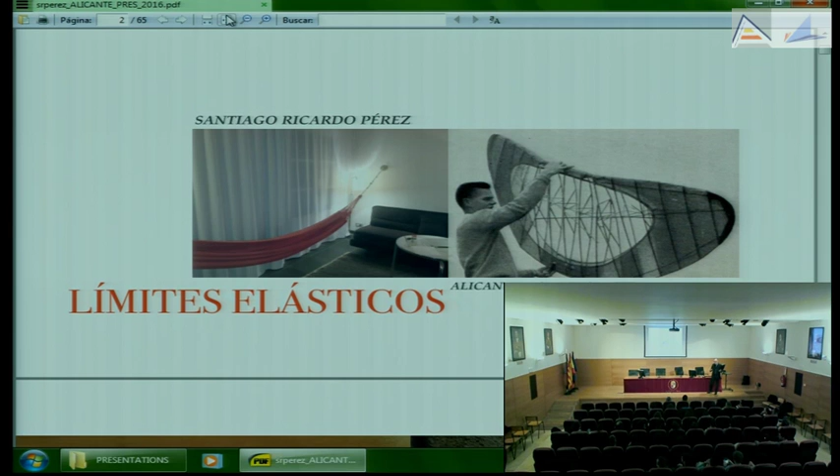Something strange started to happen. I spent 2 days in Barcelona before coming here, and everywhere I looked, it was like my hotel room, and instead of giving me a bed, they gave me this hammock, and I'm like, what's going on? Everywhere I've been, it's like I'm preparing for this event. It's been just amazing. Then the image on the right, I'm not sure who he is, but it kind of encapsulates everything I was hoping the fabrication workshop would be about, mixing skin and structure and things like that.

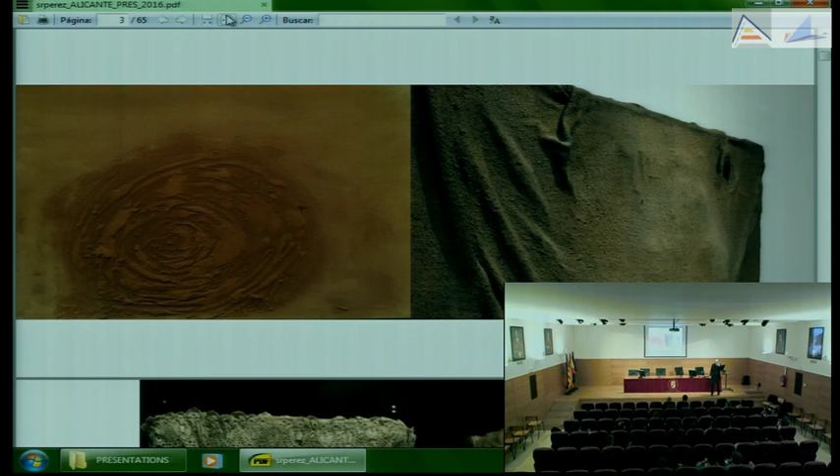Then I go to Tapies, the museum, the foundation, and the paintings are starting to look like things I imagined we're going to make, and it's just been incredible. Then I go to the Design Museum in Barcelona, and again these things are there, and this is kind of what we're going to do. Everywhere I went, it was like Spain was telling me, look at this. It's been just incredible.

So I want to share with you some of my beginnings to give you some context. I had an opportunity, if I can figure out how to do this laser—there it is—to study under Tadao Ando at Harvard at the GSD, and he was a professor there.

It was one of the few times he's taught in the United States. After that was over, he invited me to go to Japan, and I didn't have any money to go. I was very lucky—there was a traveling scholarship or fellowship that year, and I was able to get it. So I spent a year as a researcher in his office, looked at all his work, and had a sort of desk to study in his office.

But along the way, I started to meet also artists in Tokyo and Osaka, and I met this woman—I don't know if you can see this photograph very well, it's kind of dark—but her name was Naomi Seki. I was incredibly impressed with the way she worked with materials. I'd never seen anything like that before.

So I said, look, I don't know how I'm going to do this, but I'm going to invite you to Boston to do a joint installation and show your work. This was the first group of students I started working with back in 1993 in a design studio where we mixed drawing and regular design with full-scale making, and I've never stopped. I've been doing this ever since.

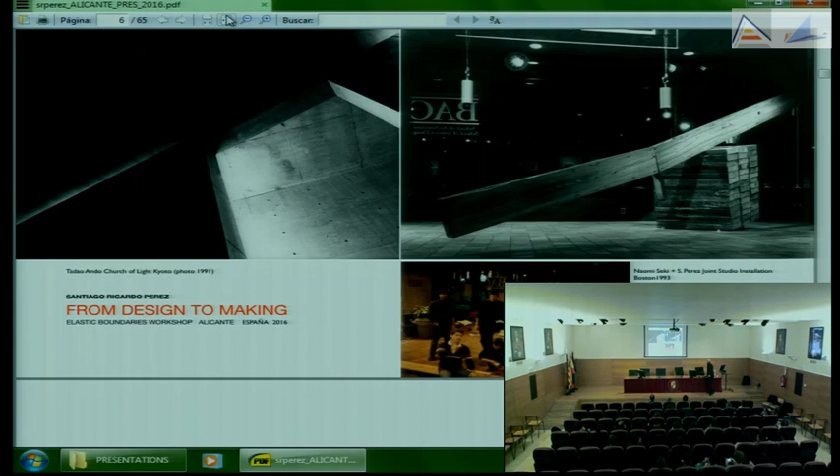And then the guy here with a little bit more hair, that's me. I could tell you stories about each one of them. That's kind of the beginnings of where these kinds of workshops and the type of studio I've been teaching came from.

I couldn't really think of a better word for this, so somewhere the word monster came up. I thought it would be fun to talk about monsters, and maybe there's a lecture I do on monsters. But these are just some quick images I sent over in preparation for the workshop.

The one on the left, many years ago, one of my students in Arizona built this little model. On the outside is an exoskeleton structure, and the interior surface is pulling on that structure. What was really interesting was, only about this big, but I've always remembered it—they were kind of codependent.

The skeleton would fall down without the membrane, and the membrane would not stay up without the exoskeleton. Then the work of Sean Ahlquist is this image here. He's teaching in Michigan, does amazing tensile structures, and codes meshes in Rhino—or not even in Rhino, he does it in pure code and processing—then adds the gravity force and watches it fall. He came and did a workshop with us.

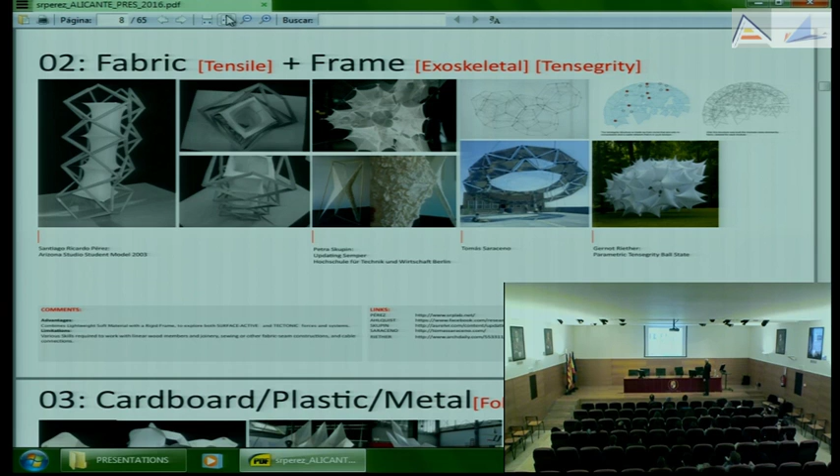This is Tomas Saraceno's work, and somebody did a pavilion that, I don't know, it's not really like what we did, but these were some images I sent over to get the conversation started. And again, these are pavilions I've done with my students. This is one in Houston—we used polycarbonate to set up a shell structure.

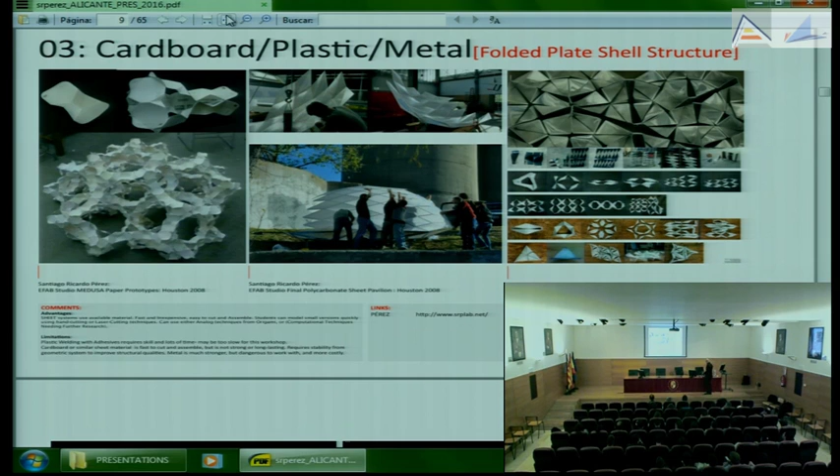The reason I wanted to show this image is because the way I introduce things, at least the way I think about them, is that we don't necessarily have to start with a form. You can start with the module or element, and learn the rules for how to combine that little element, like a piece of paper folded into a much more complex module, still not knowing what the form is going to be. That's how nature makes things. That module combines with some rules and ends up with something much more complex. So that's been the theme of a lot of the things going on.

I'm showing you a few images of prior work with my students in Arkansas, because they inspired what I wanted to do here. I had a student named Blake Leonard, and he was making speakers for putting in your car when there's a game, to have music in the parking lot. I said, what is that? And he told me.

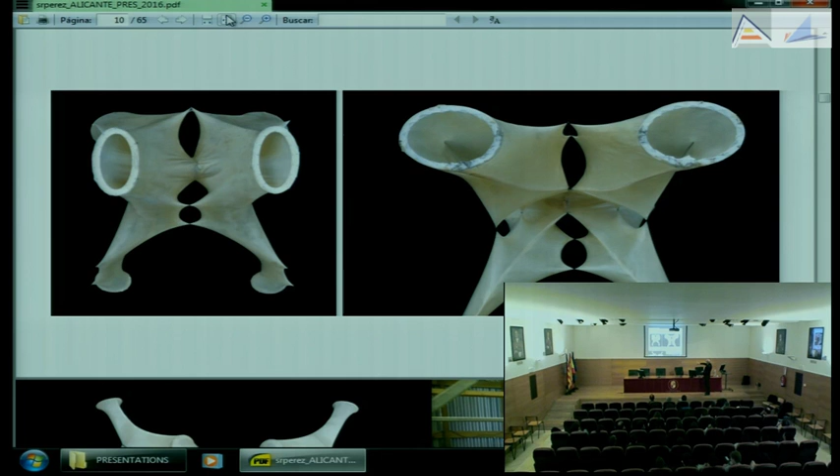So we started coating stretch fabric, which can stretch in two directions, with resin. You could pull these points and create complex shapes, but it always ended up in these points. Then we figured out you could go to the laser cutter and cut a shape. That's very important, because now you can start a conversation between the digital and the physical. That's the other theme: this conversation between digital and physical, to calibrate material, take it back into the simulation environment, or produce work that transfers well to specific material systems.

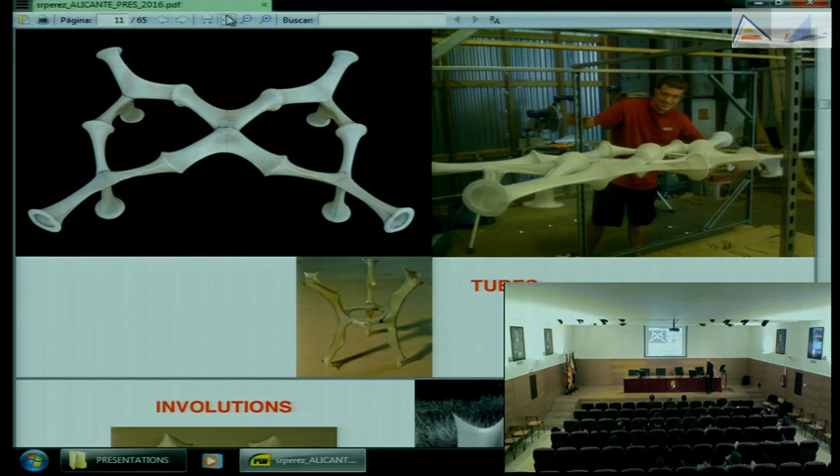Here he is working with a frame, beginning to create this kind of network tube structure with the laser cut plates, and with this little one, which is the one he started with. And then the other one I've shown a lot is this bone piece he made, which is just flat pieces of fabric. They weren't hard at all. Then with the resin, making them quite hard, and that's the final piece.

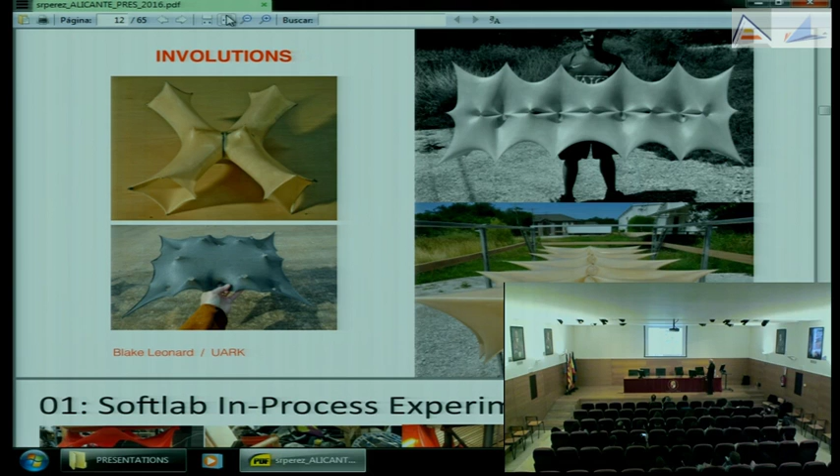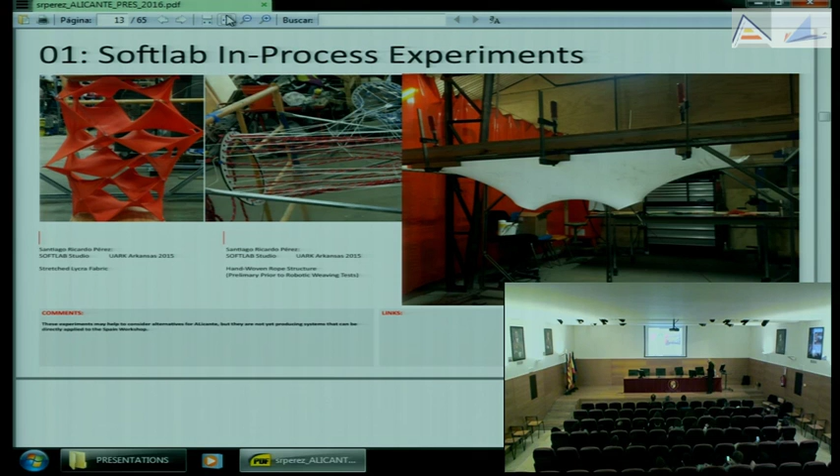Right before coming over here, my current students were throwing some things together so I could figure out how to set up the workshop here. It really became a conversation between the line of the string or rope and the surface with the stretch fabric. I made a quick test to see how we'd set this up, which is to begin tensing the fabric in a vector so you can create a volumetric shape that can then be hardened with this mineral and resin mixture, and turned into a compression structure. So that's some of the background.

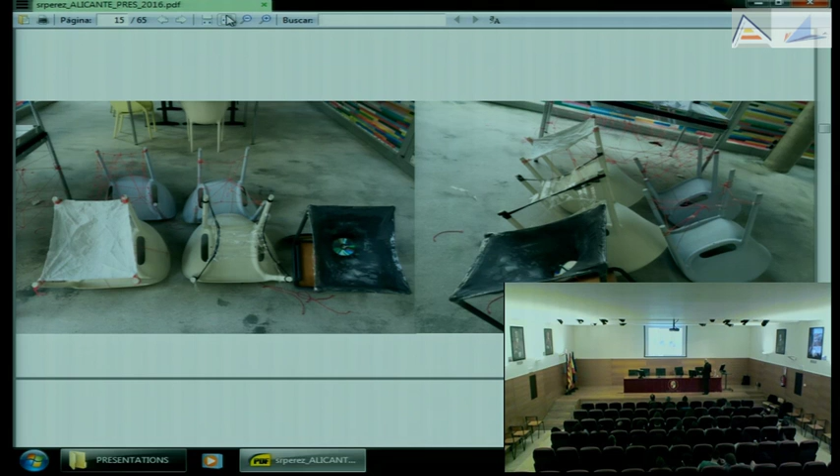Pretty much the first day was crazy. We didn't know what we were doing. We grabbed the chairs in the classroom and said, let's use these. So we turned them upside down and started weaving thread like a spider. Then I said, go to the bathroom and get some paper, let's wet it so we can see the surface. We opened up the material we're working with and made our first test, pulling on the fabric and then painting it with the material. In 20 minutes it was hard, very, very hard. We knew it would work and that we could use it. That was the crazy first day of trying to understand what would happen with these materials.

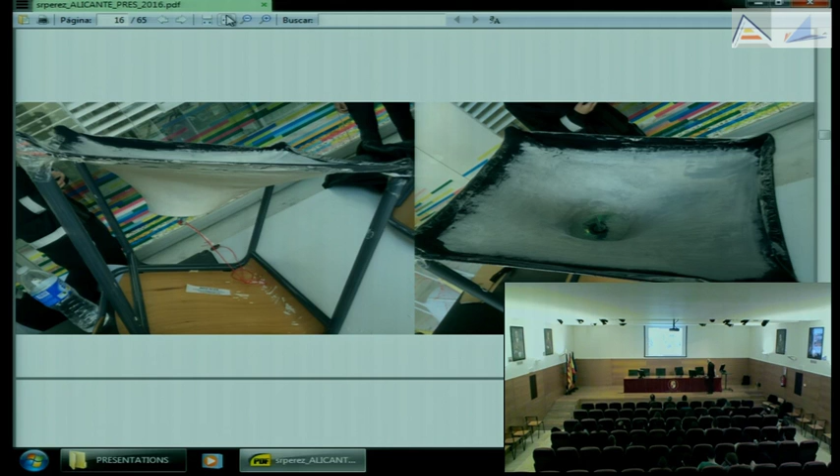Here you can see it's just like back in the Fab Lab in Arkansas where I'd tried that test. It's a very similar shape, just pulling on the material, keeping it tense, and creating this shell. So with that, we thought, okay, no problem, let's keep going and we'll create beautiful work. A lot happened in between, and I'm jumping to the finished product. I think Matthias, who's here, gave me a flash drive with some digital images, and I haven't even looked at it, but I have it here.

We had some time when we were trying to figure out if we would do this in a parametric software, using the force of gravity to simulate the way the surface would deflect. We could control all of that and simulate it in a digital environment before spending the time, effort, and material that we only had a limited amount of.

So the first few days, or one day really, we gave 3 different groups the challenge of taking the material with different colors, picking a different part in the building, and seeing what they could make, with some rules. The idea was that we would take the points and pull them, but then maybe get more specific about the way the fabric is formed.

The first group picked this passageway that serves two purposes. One, it becomes like a mural, and when you're sitting in the classroom you can see the elevation of it. It's very beautiful, but it also activates the space, so you can walk through here and develop a volumetric and spatial field with the fabric.

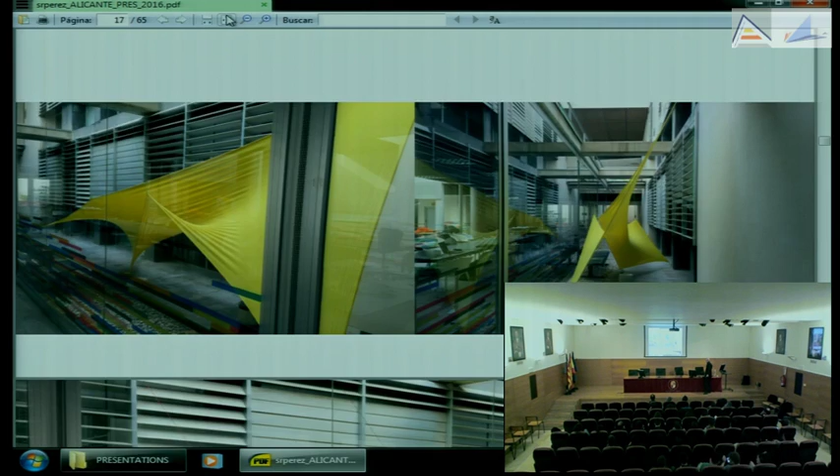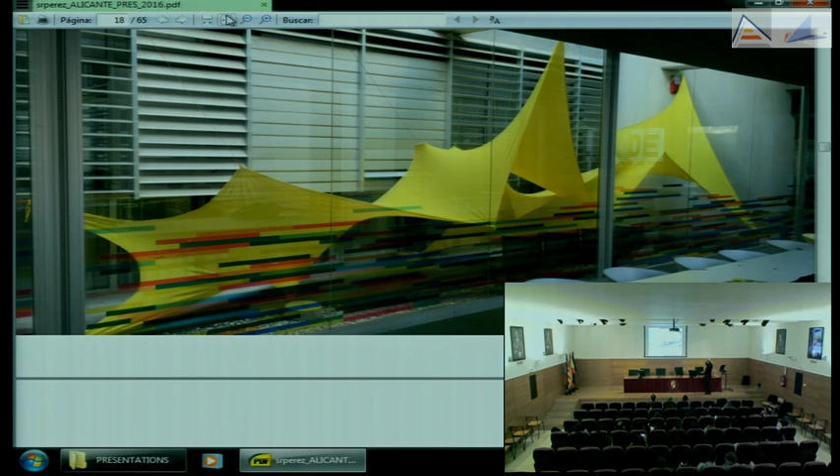So this was just for our students to become confident working with the material. Here you can see we've transferred from pulling points to beginning to shape the pull so that we can create these kinds of funnels and voids, and then later harden it and so on. This was just to become familiar.

And these are way out of, these are like totally out of sequence. I just threw them in, so I apologize.

And we'll jump back to some of the other ones. In fact, let me see if I can do that. Yeah, so this is the second one. So the first one was sort of the backdrop of the classroom, and it's also kind of a secret passageway.

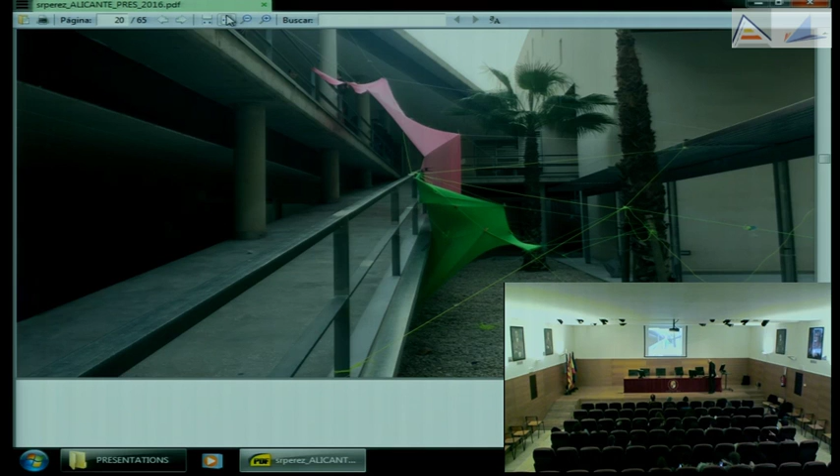This one is the ramp. So we started covering the ramp and seeing what we can do with the network of fabric to turn it from just a skin into a kind of volumetric thing.

And again, I apologize, so these are out of order. I'm going to come back to this.

Then we thought, okay, this is much later. After we went through those first phases, the next question was, how do we begin using this material as not so much just a soft, stretched fabric, but can we begin thinking of it as a surface structure, surface active vectors, where you're beginning to think about transferring from a tension system to a compression system, and seeing if the material would be strong enough and if the resin mixture would work, then applying a sort of geometric rule.

So what we did for this piece, we hung it in the courtyard, and then we started both pushing the fabric out but also pinning it back in. So you have expansion and compression laterally to create a kind of strength and patterning in the skin, then come back and coat both sides of it. The intent was that we were hoping we could actually detach it and place it so it could carry its own weight.

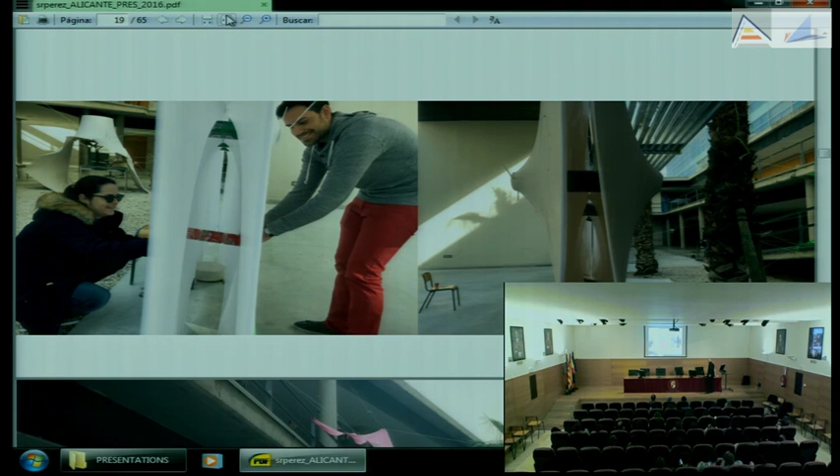So this is quite far along, actually. This was two days into the project after we had done all of these others. Here you can see it's liquid resin, then a mineral powder, and we mix it in the correct proportions.

Another project we did, there was a conversation with the professors here, and we started to talk about the possibility of creating an acoustic shell or acoustic environment where you could place something in there and listen to the sound, because the qualities of the hardening of the material create a beautiful kind of resonance.

So in order to do that, we really had to create a piece that would be large enough for us to get inside and to listen. It's maybe 1.5 or 2 meters. To strengthen that and create a surface that could hold itself would be difficult.

So this is all happening, learning with your hands. All of this is what the theorist Michael Polanyi calls tacit learning, which is not about making the plan and the drawing and hoping you have it all completely figured out. It's getting out there and just seeing what works and learning with your hands. This kind of design and making has been the constant theme.

And we just placed these pieces to push and create a sort of micro pattern in the skin, so that the corrugation of the skin would then help it sustain the weight. And here, then we had a structural engineer make the first test and hold up the canopy, right?

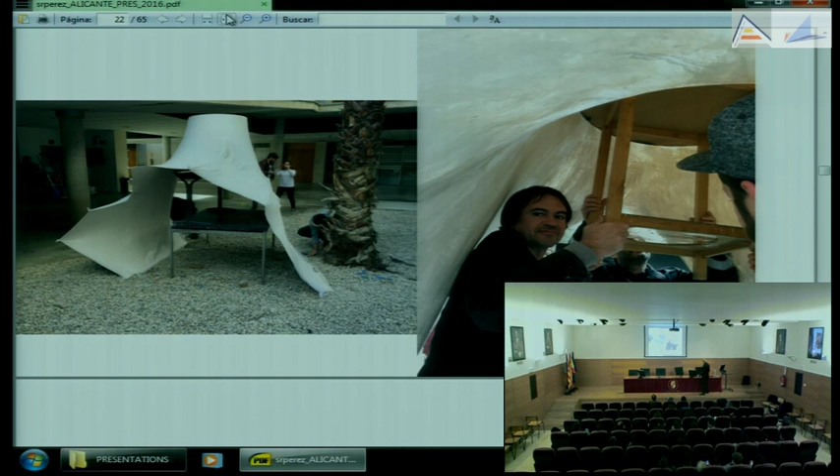So this was the last one we did, which was to try to create a kind of spatial environment or shell with this process. And then we went on a journey—it's like Don Quixote, traveling across Spain. So we took it across the campus to the music school, and this is a whole other story of what happened here that we'll share with you.

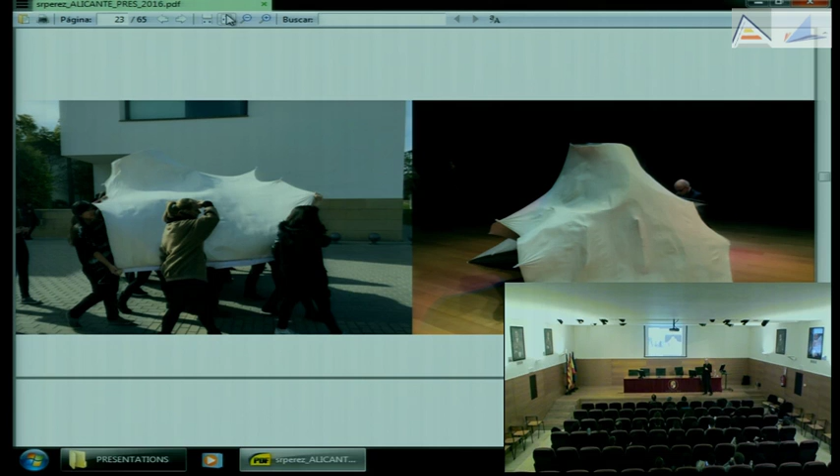So that was the trajectory of the week: going from initial studies, trying to understand the material, doing a few experiments, then quickly testing the resin and hardener to see if we could come up with a rigid shell. Here you can see the other large piece with the push and pull on the membrane—it has a lot of weight.

So we learned a lot—this is all about empirical testing. We learned that we really need to apply many more coats of the resin, and that we need to study oriented fibers. So if you add fiberglass, glass fibers, and begin to orient them, we could create a much stronger panel.

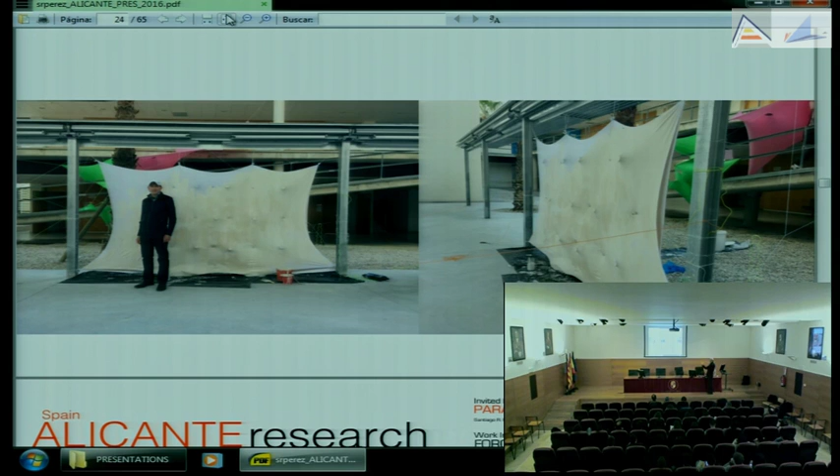But the difference with this one and the ones we did before is that now there's a regular grid and a regular order—almost like a Jean Prouvé panel, but trying to do it out of the soft material instead of a rigid one. Yet we still allow the conversation to continue, the tensile conversation of how the material wants to behave, but now imposing a kind of order on the material from outside as well.

The other aspect of this project—I don't know if I'll have time to show you some of the digital files that Matthias, one of the students, prepared, which are amazing. Here's what happens: the digital models get way ahead of our material knowledge, and then they persuade you to want to do something that you do not yet know how to do physically. So this conversation also works across that way.

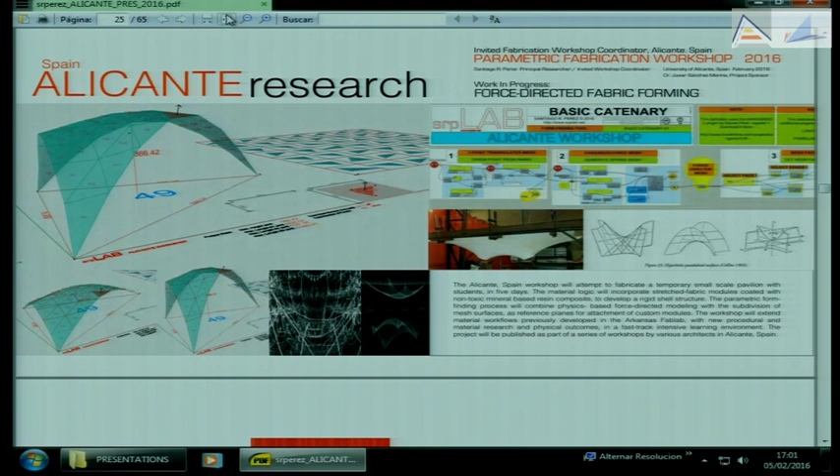So here's a setup, much like the Gaudí inverted shell, the hanging chain model. One of the things I do with the students is prepare a comprehensive design tool—it's completely parametric, with physical forces already built in. So I gave this to the students, and the idea was to begin understanding the digital modeling process. The parametric process not only allows you to quickly iterate and make different forms, but this is adding gravity—it's changing the shape according to external forces.

It's labeling all of the panels, so if we were to make this in a laser cutter or CNC environment, it would automatically let you see each panel as you select it, and give you all the shapes. This is done all the time. I think what's new about this example is that we're combining that old way of doing the surface division and sending it to the laser cutter.

This is all live with Kangaroo, a software that allows live forces to interact with the model at the same time you're getting all the data for fabrication. So having a live model that's giving you data for area, cost, everything, as you're able to flex and move the model—a kind of customized building information modeling, but instead of using something you buy like Revit, we create our own environment using Rhino and Grasshopper software.

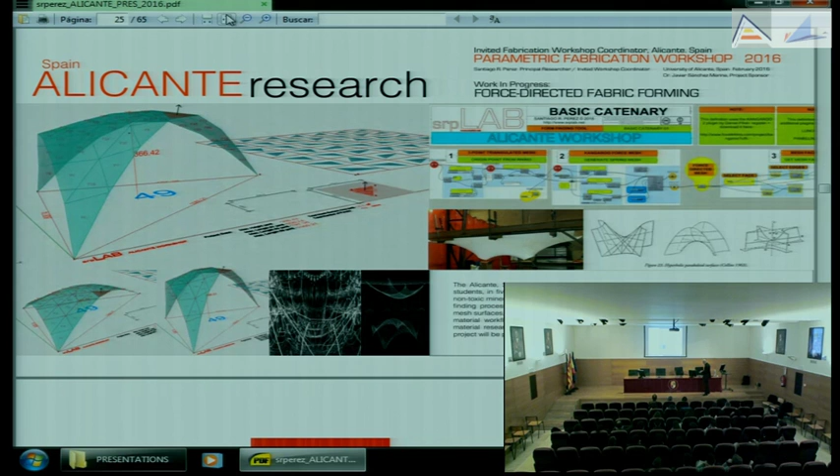So some thoughts about why I do this. This is a wonderful little book by Kieran and Timberlake, architects in Philadelphia, called Refabricating Architecture. They're saying we need to bring back the tradition of design and making, constantly going back and forth, rather than having one person design and then send the fabrication order to someone else who makes it. Of course, we can't make buildings that way.

Architects are designers, but they need to learn from materials directly. Their office in Philadelphia has a huge space inside, and when they're working on real professional projects, at the same time they're doing research and development of new systems and materials at full scale, doing amazing experiments. They've taken this philosophy from academia to the professional world, and they're one of the few examples I know of.

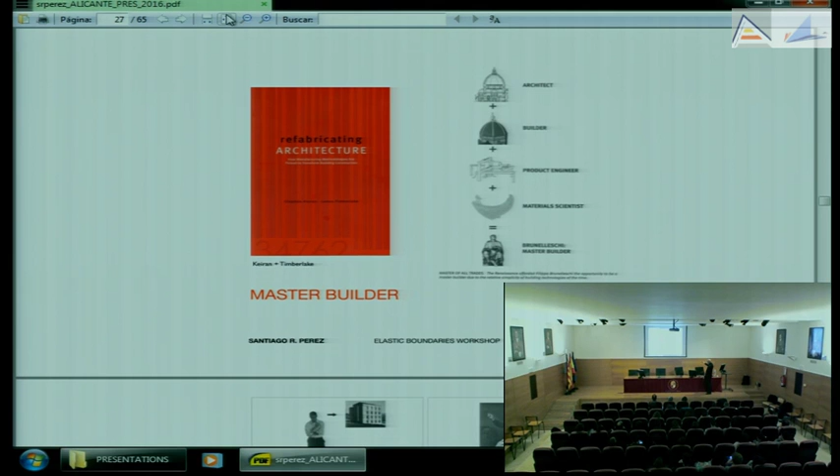The only other one I know would be Jean Prouvé back in the 1950s and 60s, who was constructing everything as well. To me, that's a big deal - the notion of the architect and builder, the product engineer, the material scientist, that you bring all those things together again, like Brunelleschi or someone who understood the entire fabrication and design workflow.

Another concept is that we think in terms of objects - singular objects when we design. But there's also the idea that an object is made out of many parts, pieces, and components. We tend, as architects, to depend on a catalog and go select everything for our buildings.

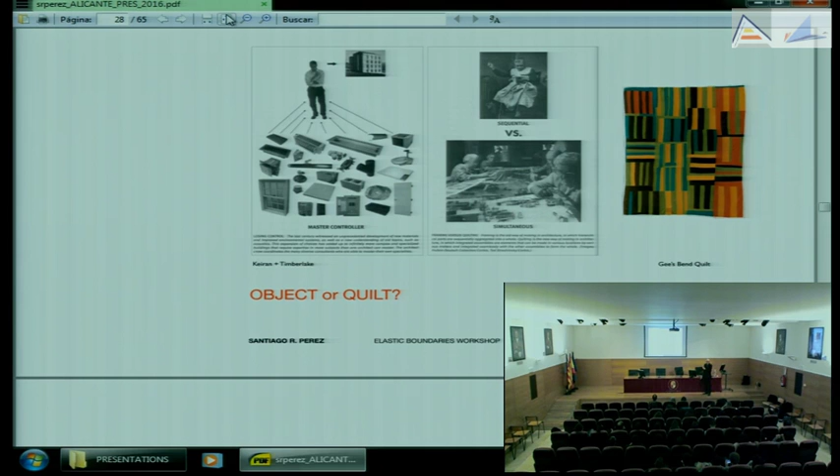The other way is to think of it at a more social level - not the architect and the singular vision, but a collective, like these ladies making the quilt. It's two different things: the master controller versus the simultaneous feedback you get by working together. Behind all of this, there's a kind of social model implied, which is to develop a collaborative practice.

Where does this come from? It comes from nature. This is a cactus from Arizona that I've been carrying for many years. What I love about it is the form - it's a very tall, thin cactus that can grow without falling over, only about that round, and it has this sort of diagrid pattern.

But when you look more closely at the fine grain, if we could see this more clearly, you would see this exact same pattern at the micro scale. Nature is very economical with materials, but also with the rules it applies to make things - the same rule at one scale, then another. That was the beauty of this.

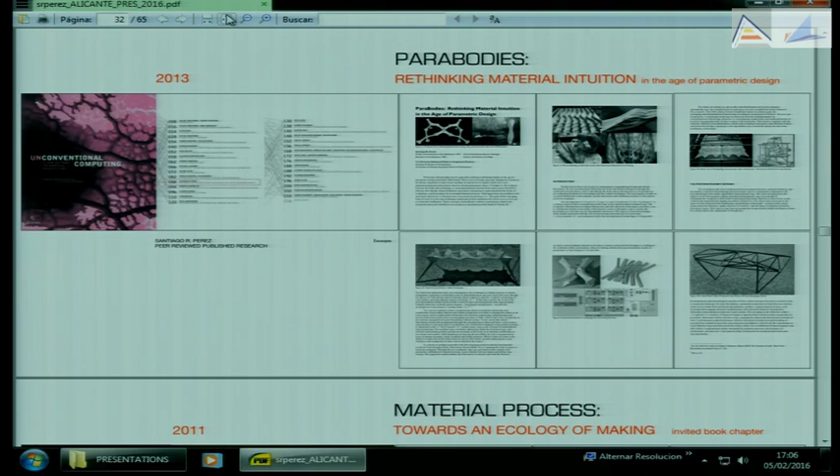So I'm going to skip a few of these slides. This research that we've done will get published, and I'm really looking forward to it. A lot of these are the same conversation - the algorithmic or digital, and then going back to the material process. That's really been the theme of the work over many years, shown here.

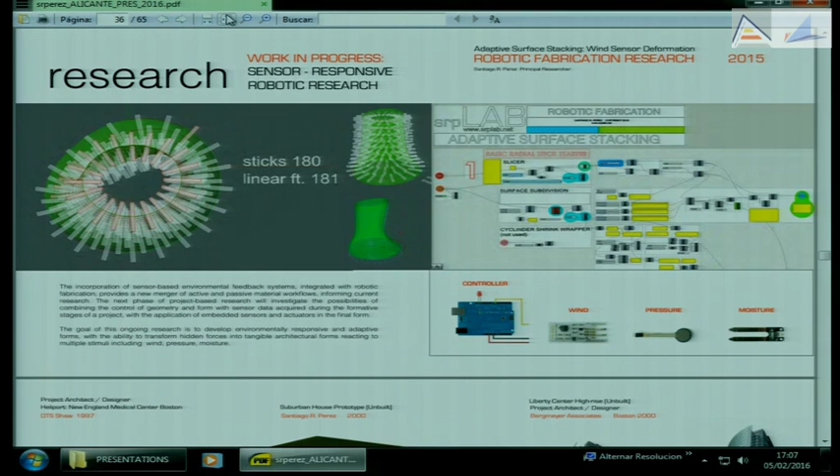So a new aspect of this work that we didn't do this week, but that I think is very important: how can we embed an awareness of the environment, both locally with cold or warmth, but also globally with climate change? How can we begin thinking about digital fabrication and design and the way we make things, but also embedding a kind of sensing of the change in our environment, both local and global. This is the next step, but I wanted to share it with you.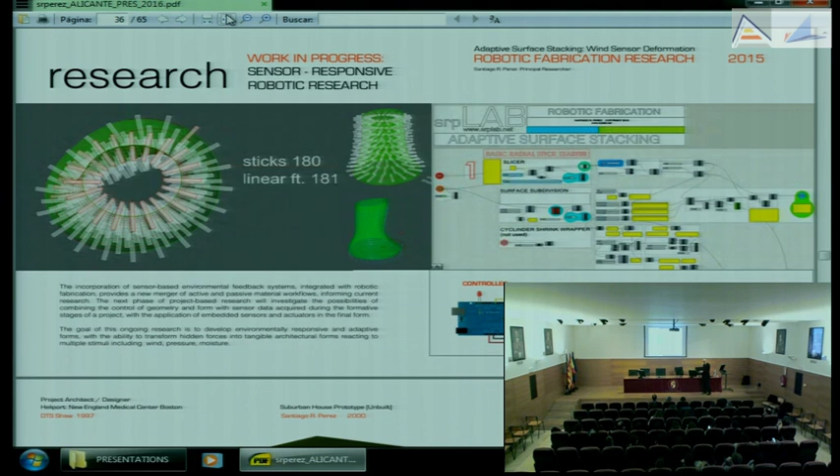This is going to be a robot stick-built sort of tower, but the idea is there are sensors - moisture, pressure, wind - and all of that information is going to affect the robot and also the final form and how these sticks are placed. The idea is to deform the geometry by blowing on the wind sensor, or to have the structure inflate because it's getting warmer. So in the process of making that, it's not just our direct desire - we begin to have a conversation with the environment. That's another theme that's going to develop.

I'll skip over this. This is from practicing, and so it's kind of my own work.

Finally, the teaching model that I like to employ is drawing to making. So, drawing to making seminar.

Whether you're drawing by hand or writing code, this is processing and then creating patterns, but really beginning to understand the structure of things through drawing, cutting the vegetable and understanding the structure, or making something after you've drawn the bark of the tree to actually then write the code. This is not a good example, but that would understand the structure of the bark and so on.

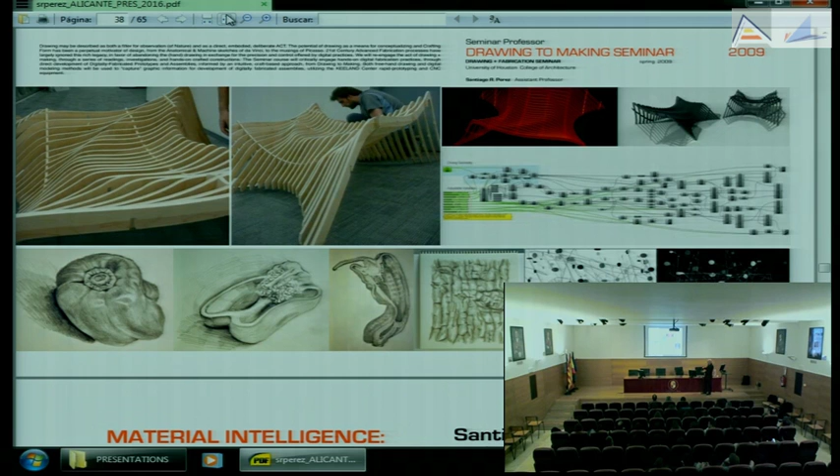So this seminar takes the entire workflow from hand drawing to coding to the grasshopper, and then finally to have some physical, tangible thing in your hand, like a chair or something that you can sit in. So taking the entire workflow and using that to design.

About a year ago, I was approached by a new museum in Arkansas called the Crystal Bridges Museum of American Art. They bought a Frank Lloyd Wright house, a Usonian house, in New Jersey on the east coast of the United States. They took every little piece apart, numbered it, put it on a truck, and took it—like from here to Madrid or further—and rebuilt the Frank Lloyd Wright house.

So they asked the School of Architecture, we need something to explain to the public who Frank Lloyd Wright is and what he did. They approached me and my students, and we spent a year. We designed and did the construction drawings, but we fabricated everything for this pavilion, prefabricated it in the shed, and then took it to the site and built the pavilion.

So this is mass customization. There's no right angles in here. Everything you're seeing is CNC cut steel and wood that are behind this plastic. All of the geometry is curving and so on.

So it's one thing to draw that and know how to draw a curve well. It's another to make a curve out of flat panels and steel, and then finally have it be like you had it in your model—fluid and beautiful. So this was an amazing process with a lot of labor.

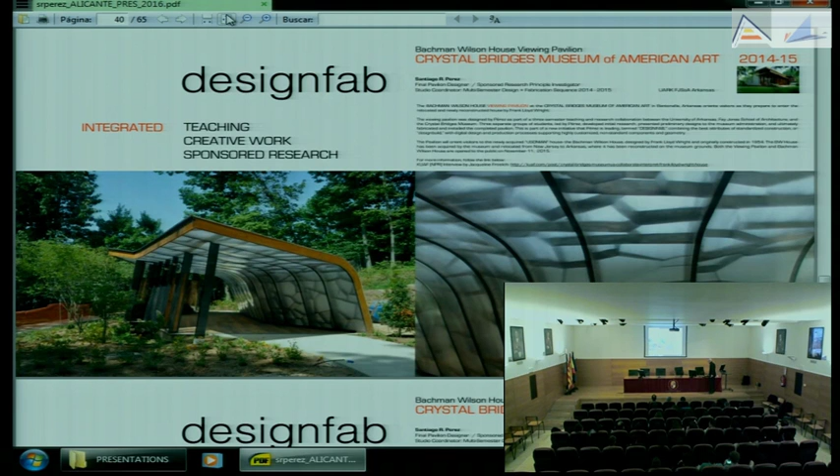And then the other thing we did is we took the patterning and applied it from the leaves on the trees and so on, the Voronoi patterning. So this was a one-year-long project, and very, very intensive.

So the reason I'm showing this is because it's probably one of the last projects I'll do where it's completely dependent on labor, on a lot of human labor, because then the next step is to incorporate robotics.

So you can see here the student is welding and cutting, TIG welding, cutting the metal, making each one of these panels by hand, understanding the angles from the digital model so that we could get the continuity of the steel panels—just an incredible amount of labor.

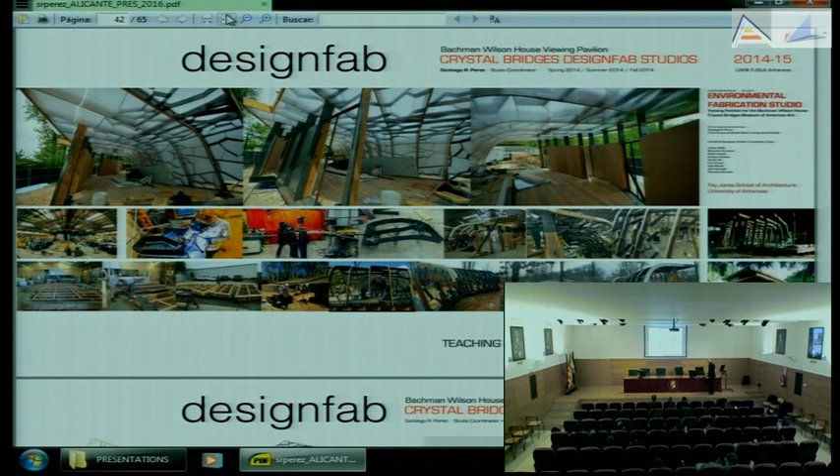And then taking everything from the shed where we made the project, making sure it fit. We built it twice, once in the shed and then the second time on the site to make sure everything would fit. So that was the prefabrication, what I call design fab.

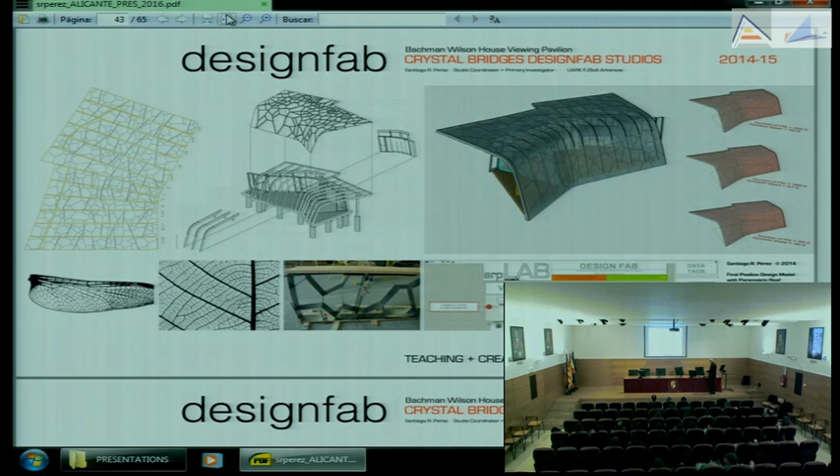And here you can see the diagrams from taking the patterning and projecting it onto the surface. So it's a continuity of the same ideas going back from 1993 with Naomi Seki to the work I'm doing here this week.

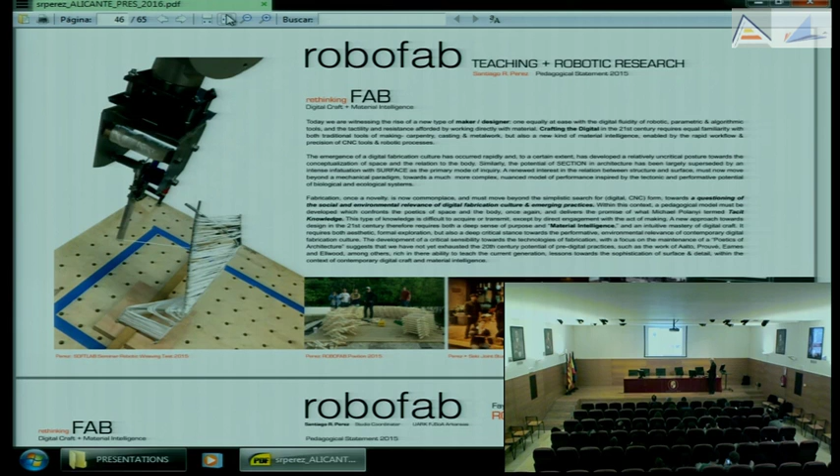The second thing I wanted to show was this project, which, after spending a year on the museum pavilion, we then made this robotic pavilion in like two or three weeks.

So we programmed the robot to pick up sticks. You can see the students here, and create modules—I'll show you in just a second. There are no connectors in this project. The precision of the robot allows each stick to be placed so perfectly that you can then take each module, carry it outside where we built the pavilion, and they all mesh together perfectly.

Okay, so there was no need for fasteners. So it's really the next theme.

The other reason I'm showing this is because going from the soft to the hard material, like we're experimenting with this week, the idea of the hardware or the connector can go away. You can start to think of the way that nature makes things, where there's no need to put a screw or a bolt. You create through the soft layering and application of material, you already embed the logic of the joint. So I think this was a way to think about that—about the logic of the joint.

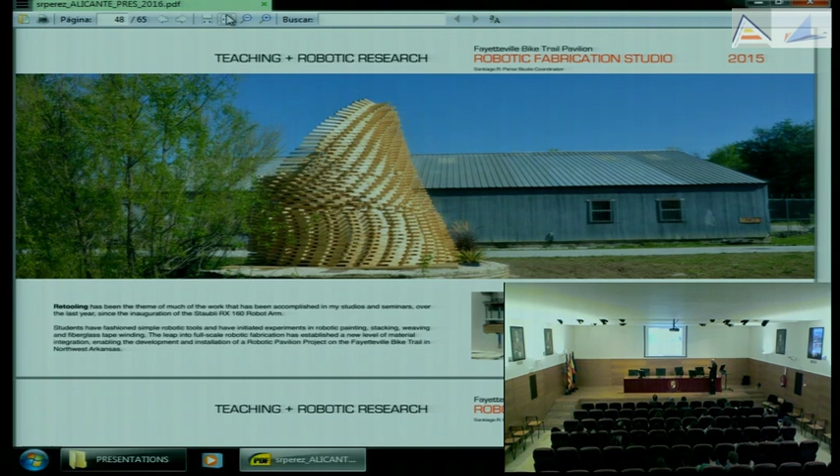And that's the finished product there in front. So this is where I have the Fab Lab. Very lonely, not like I've been here with so many friends - I'm by myself here all the time.

This was all built in 2 weeks, very fast. And then here you can see the diagrams, going through the Rhino model and creating many variations until we decided which one we thought we could build.

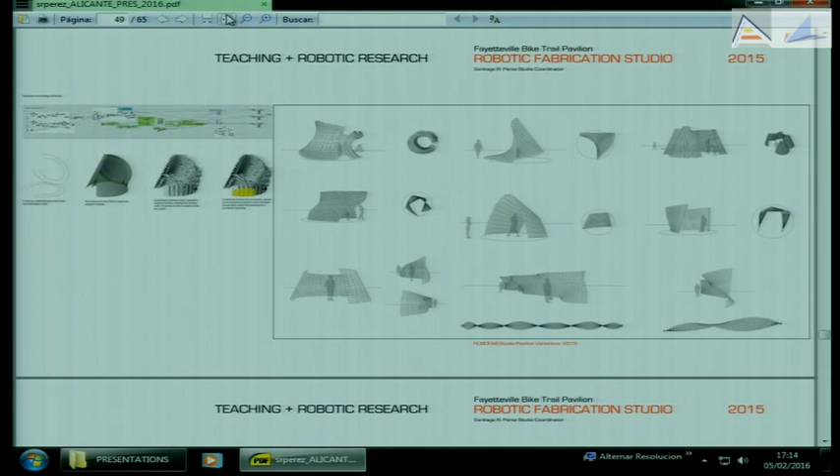And then here you see the robot in my lab, and it's got a stick. It has to choose - it has 3 different lengths of sticks, the short ones, the medium ones, and the long ones. So it goes and picks up the correct one.

Here you can see the sequencing, and this is the motion path that the robot has to take to place each stick. The sequence is important because if you tell it the wrong thing and these aren't there yet, it's going to come over here and put a stick and then drop it, and there's nothing there to hold it. So you have to change your thinking when you do this from geometry to choreography - how things move and the trajectory and space of the robot.

So you have to completely take the data from the Rhino model and rebuild it now, not in terms of geometry, but in terms of the way the robot is going to move in space to create the first module and the second and the third and so on. Then as we take these out and remove them, we're ready to make the next one. So it takes about 30 minutes to stack the sticks, and we have a module.

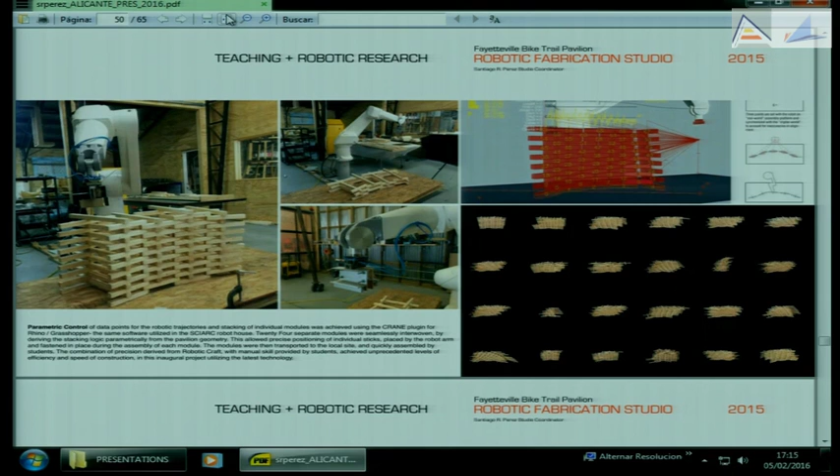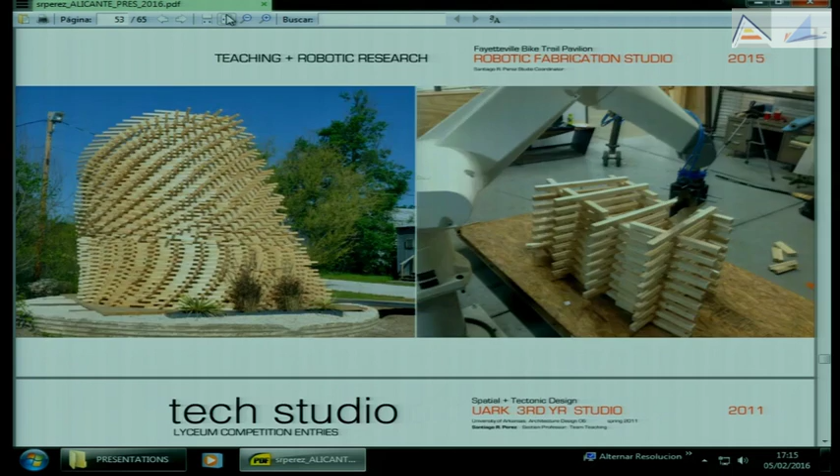So it was very, very fast. I'm not going to show you all of this work - I'm going to just flash through it because I want to get back to our pavilion here and show some of the digital studies that we ended up with.

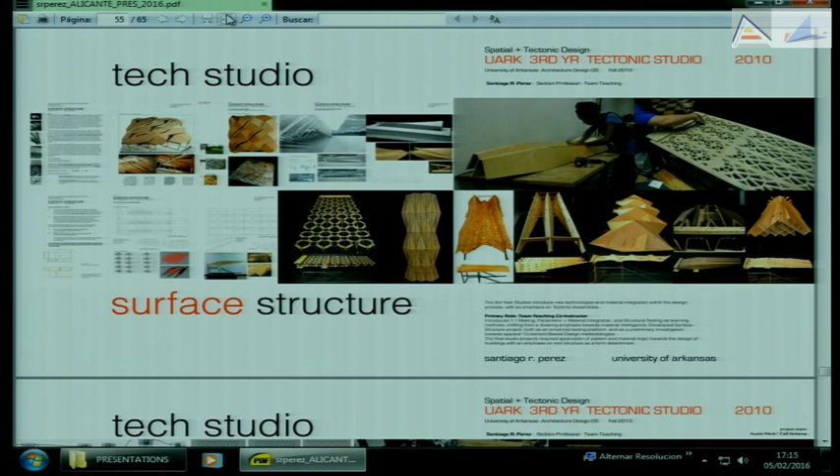But you can see in all of the classes that I teach - this is the regular third-year undergraduate studio - we do regular drawings and models, but then also I try to do what we did here this week of working full scale with materials.

This is in the hallway. We didn't have a Fab Lab when I did this - we didn't have anything really, just like a drill and a couple things. And then these are all the things that 40 students did for this project.

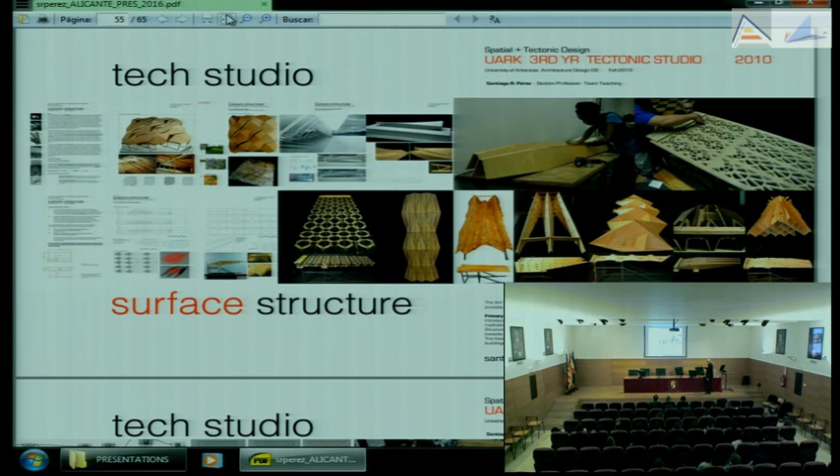So going back and forth between the regular kind of design studio environment and the small models is very important, and then understanding the logic of those materials on the design through actually making it at full scale and having that feedback from one to the other.

And there's some more. Here we're structurally loading it, and we had a great day when we broke these, and everybody's yelling. So we wanted to see how light we could make the skin, and then how heavy, how much weight it could take.

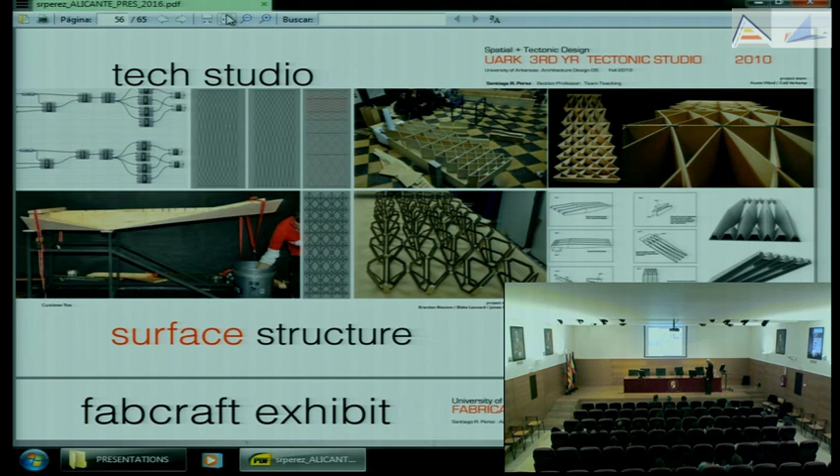Okay, how much time do I have? It's a good time? Yeah, okay.

Again, it's all about logic and emotion, or intuition and logic - the emotional side, the love of materials, but also to have a rule, to have something that repeats and allows you to work in a disciplined way.

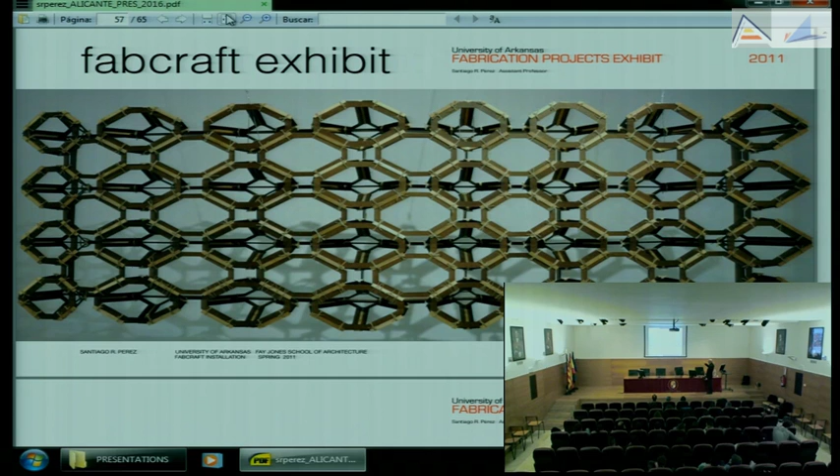So this is just string and a very thin board, tied together to create this sort of parametric logic. Other examples.

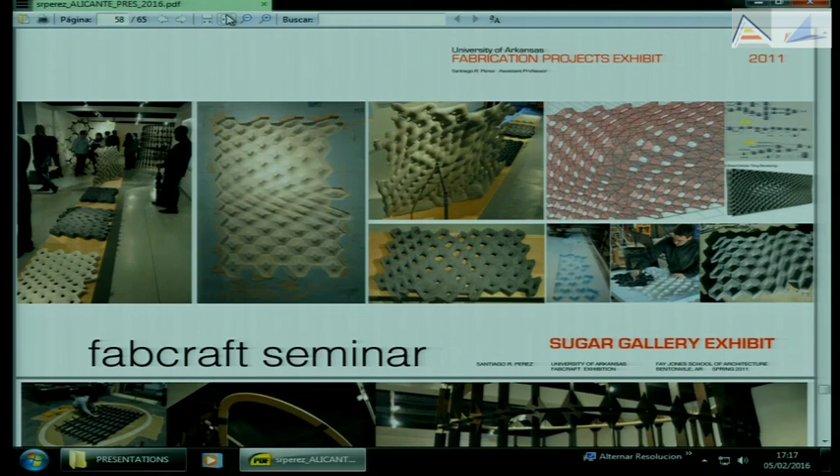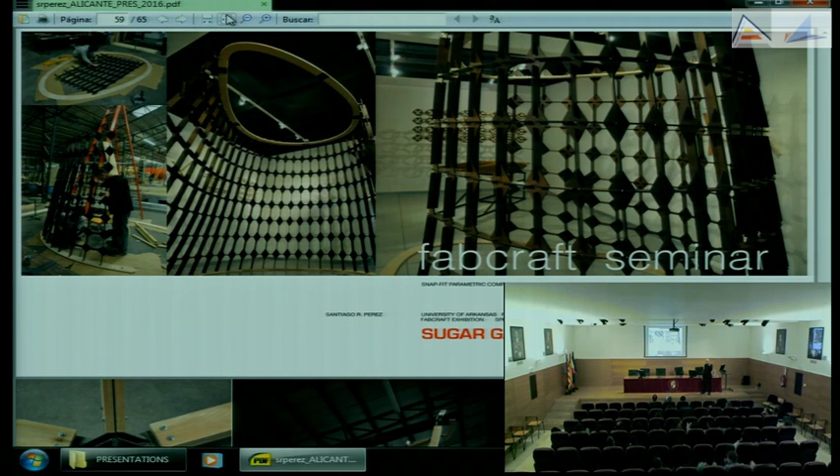So today we were talking about, when I was introduced, that what we take away from this week is not whether the final form was able to achieve the goals that we had, which were quite ambitious, or not - it's what can you do next.

This is a flat pack, completely parametric model was used for this, so if we change the form, all of the joints would change as well. Akihiro Yoneda, the student who did this, is now working for Kengo Kuma in Japan. I'm not the only one responsible for that, but this project really did a lot for him.

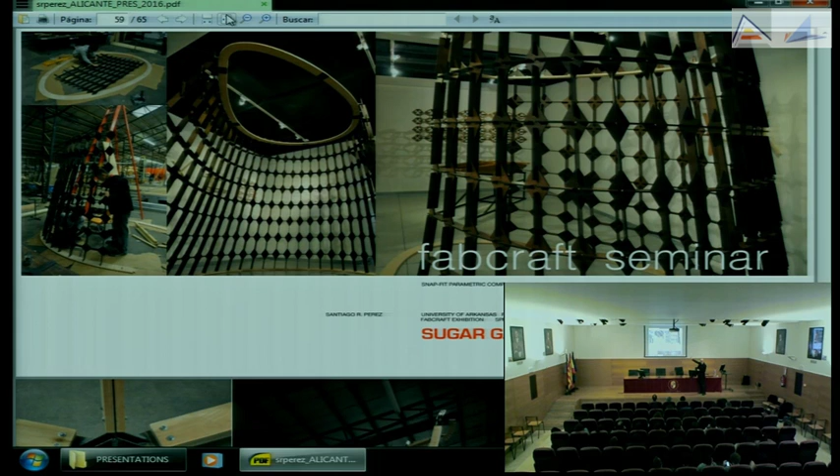And what he did is there's no tools needed to put this together. You just press the tabs and everything is flat, comes off the laser cutter, and there's no tools at all that were used for this. It just fits together and snaps and then creates the form.

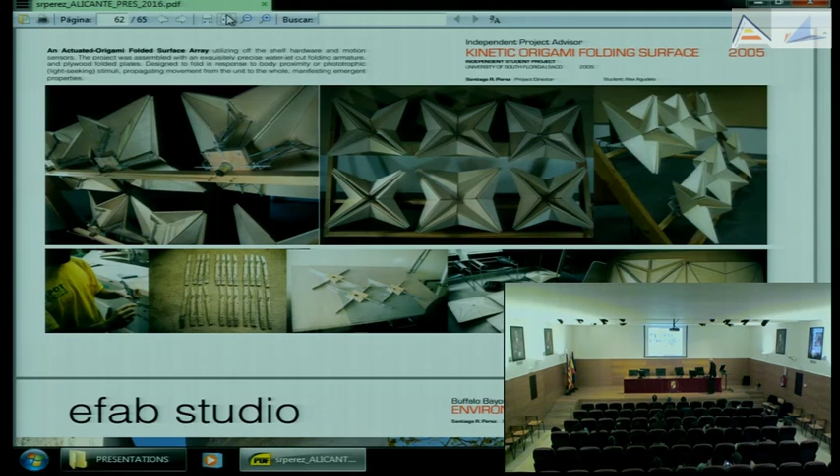And the rest, there's a lot more I can show you. These are from Houston, so we wanted to work with the wind. These big structures, the wind comes through here and accelerates. So we wanted to create a structure that allowed you to see the wind.

The material we used was bent plywood. Here you can see the scale, one panel is about the size of a person. They're vacuum forming it, creating all of the joints and the bent laminated wood, to then have this kind of cloud that goes out into the landscape and becomes a visual experience of the wind.

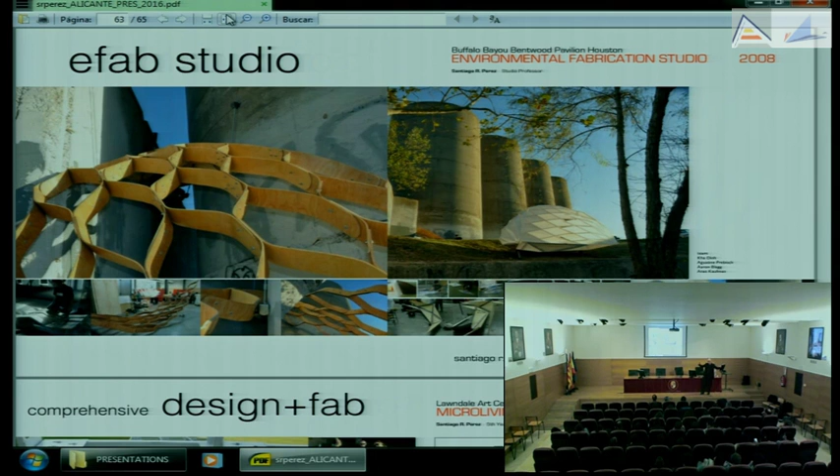If you go and stand there on a cold day, the Venturi effect is enormous. The wind just... So we wanted to visualize the wind.

A couple more projects where this was a studio together with William Massie, who's up at Cranbrook, to look at systems that can be modular, that can be both welded and bolted, so that you can take the components to the museum or to the site where it's going to be assembled.

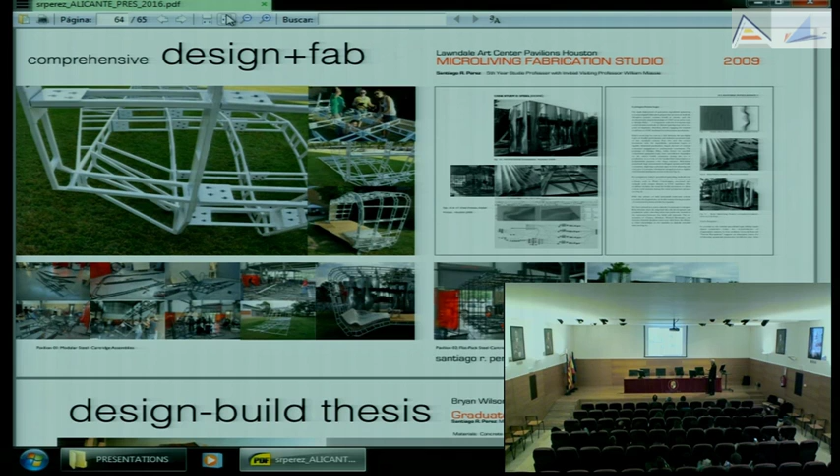So you're working with the little red book of refabricating architecture, which talks about making things the way they make ships now, where they chunk the modules and it's not dependent on gravity. The way we've made things this week is gravity dependent, completely gravity dependent. But there's another way, which he calls chunking, the way they make supertankers, where you don't have to wait for gravity. You just make things, then bring them together, which is what we did here inside the lab.

Finally, I think this is the last one I wanted to show you. The work we've been doing this week was inspired by a student I had back in 2005. He was going to do his thesis, and he came to me and said, 'Professor, I'm going to take $10,000 of my own money, and I'm going to make my thesis in my backyard, in my house.' So it was a lot of trust.

And there he is, that's Bryan. He didn't know how to work with these materials. We had been out to the desert and seen the cactus. He came back and did laser cut models and so on. This is the rendering of what he wanted to make, something with a beautiful fiberglass skin, kind of like what we made here today. And he wanted it to open, and all of this.

You can see he's working with wooden panels, trying to make a compound curve, which is very hard. Then he worked with metal and discovered that when you try to make a compound curve with metal, it buckles and doesn't want to stay smooth. So he learned that.

And then finally, he worked with latex rubber, and this was in Tampa. What do you think happened to the latex when it got hot? All the connections started to get soft. So working directly with these three materials, he got the knowledge and the confidence he needed, and he started building his thesis.

Then he wanted to apply the fiberglass, and I don't know if I should tell you the story of what happened with this. Let's just say that we let him graduate. He got far enough along with the project that he had control of the material logic and the material system he was investigating.

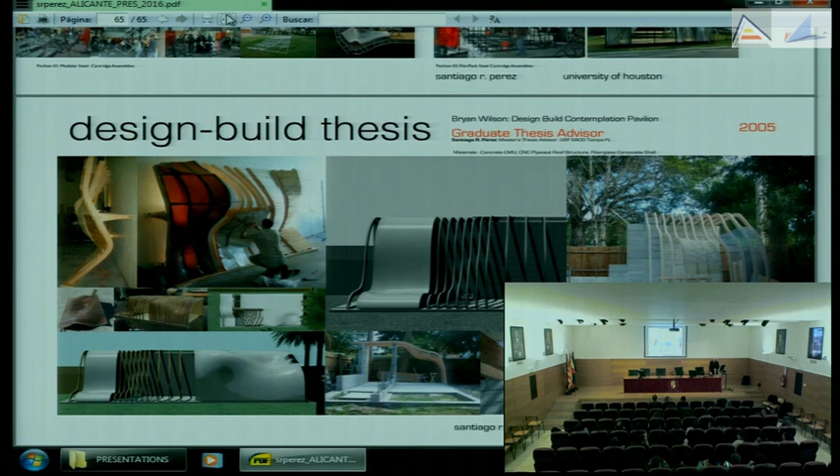Let's see, Matthias, where do I find it? Alicante? Because I want to show your digital images. I don't see it. Here? Okay, all right, and these are the ones? Okay, so let's...

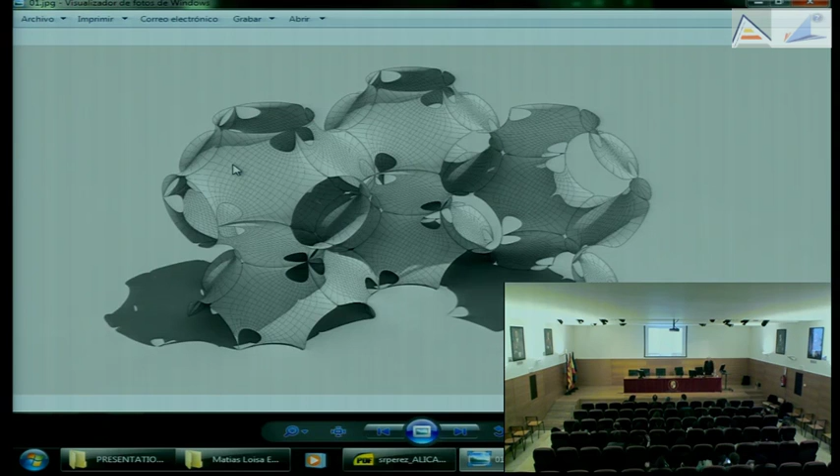So I wanted to show you his work. We did not really have the time to combine the digital. Even though I prepared the model and thought I would get here and hand it off to the students, in one week it's impossible. You either have to choose digital or physical.

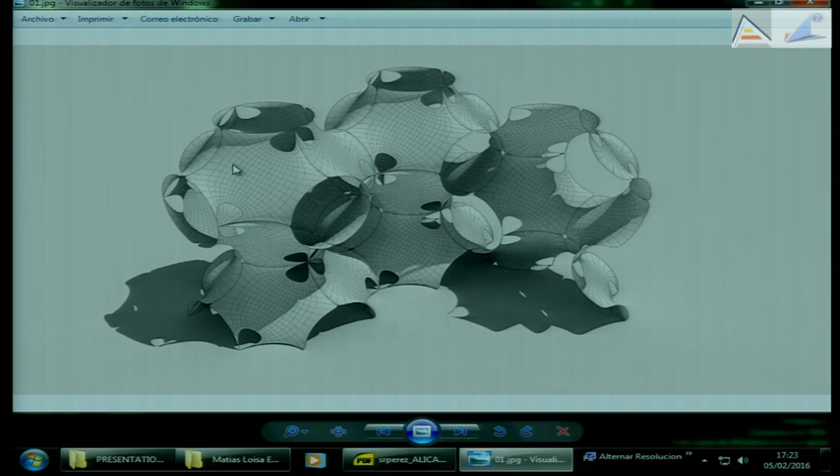An ideal way to do this is we would have spent the first week doing the digital and preparing really well the plan for what we're going to do. Then the second week you take the digital models and transform them into the physical. So what I did is said, okay, let's pick one or two students who are only going to work with digital while everyone else works with the physical.

So Matias did these beautiful things. What I'd like to ask you is which ones are purely geometric or topological, that you only used your modeling skill, or did you use Kangaroo for some of them to apply gravity and force? I think the answer is you only used the geometric version.

I don't know, these ones are more handmade. Yes, I only used a script that simulates the relaxing of the mesh.

Yes, yes, yes. So he's working with a family of surfaces called minimal surfaces. They come from mathematics, triply periodic minimal surfaces. And they're like soap bubbles. The equilibrium of the force on both sides of the film allows it to not pop, not tear, or not break.

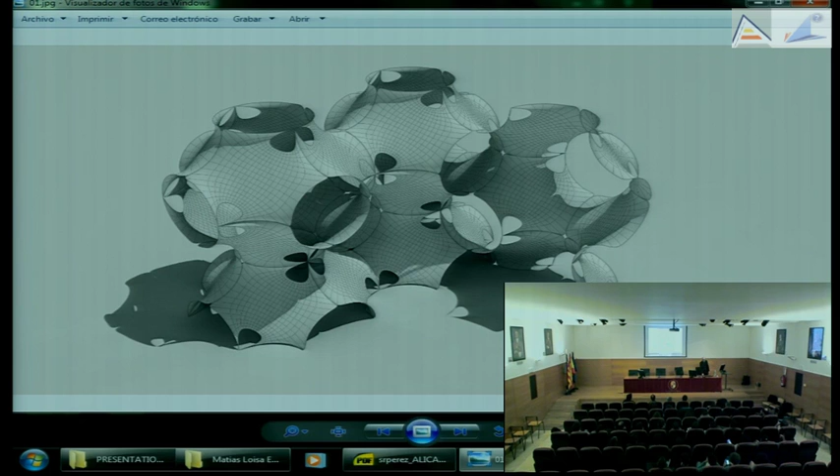And then how do you work with those forms, not so much the shape that you want, but maintaining the equilibrium in the surface, and then working in an additive way where we can have many, many modules and combine them to create this sort of complexity. So this is what you've been investigating during the week.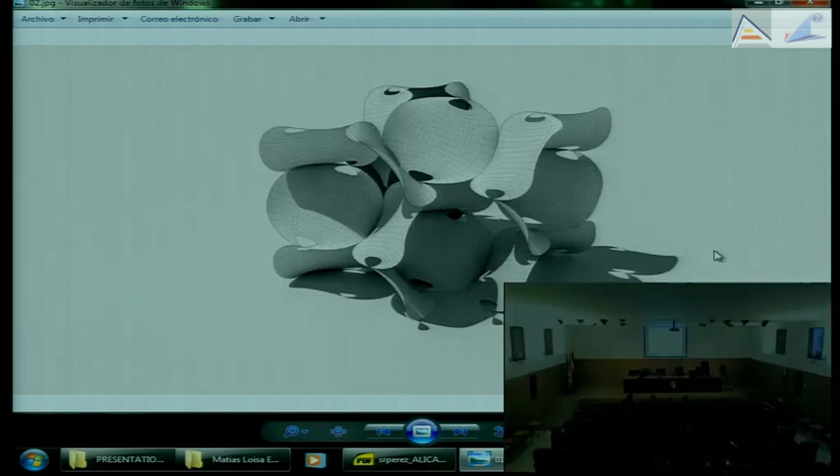And these are some of the images that came out of that. So the work that we showed at the beginning with the hanging skin, this is what we would continue to do and make with multiple modules. Now with much, if you remember the bright orange and green panels at the beginning, but now taking that...

And the first time we did it, it was with intuition. It was not so much with the logic of ordered rule, but looking at the space, looking at the passageway or the ramp, and then beginning to work with material. So this suggests another way of working, where you have a kind of ordered lattice or grid, but you're always also having that conversation with the stretching of the fabric, working back and forth.

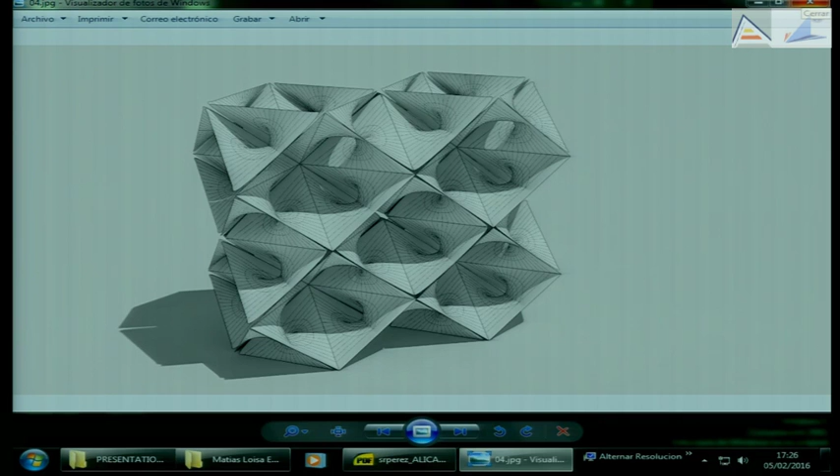I would love to continue this and for you to take this now and actually use the resin that we still have and the powder, and make some of these modules, right? That would be the next step.

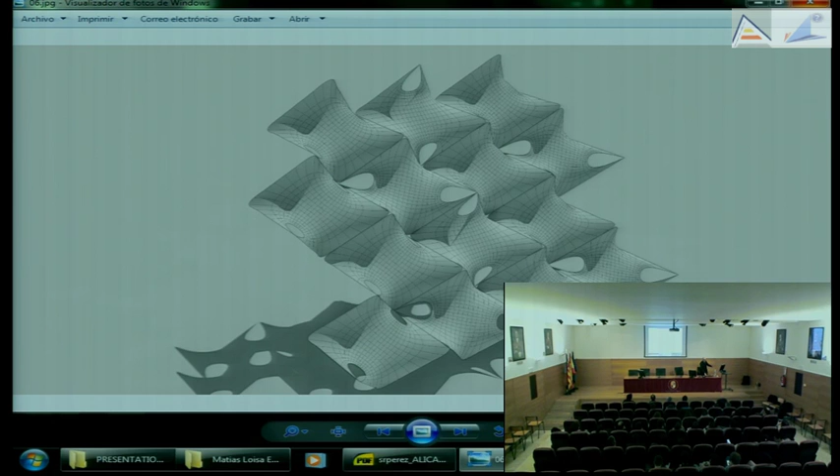Beautiful, beautiful work. This is the first time I see this. This has all been happening in parallel with our physical studies.

Those are made from a cube. Yeah, so the way a lot of the geometry starts is very simple. It's inscribed within a cube, but then through going from the rectangle to a saddle, to a doubly curved saddle patch or shape, just like taking a little piece of paper and bending it in two ways, that becomes the module instead of the flat panel. And then that can develop much more complexity in the form.

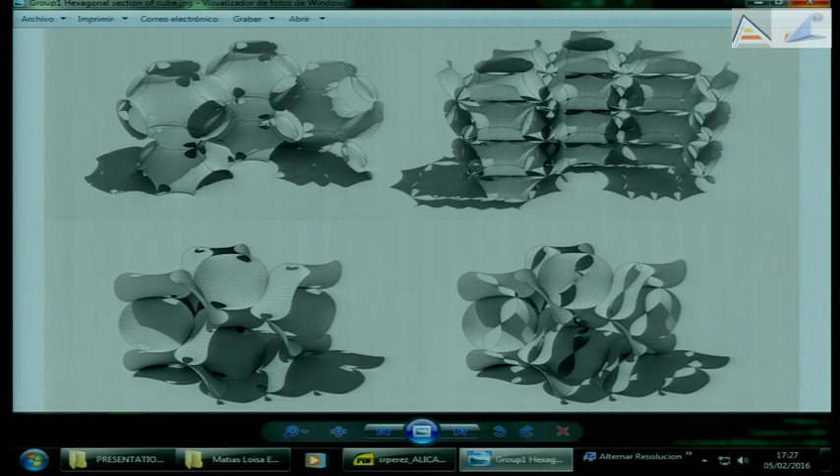Am I going around and around, or are these new ones? Okay, beautiful. Now the last thing I want to show, if it works, I hope it works, is we went on a journey. We decided that we wanted to take one of our projects on a kind of magic journey, and I hope I'm able to show it to you.

So before this plays, I'll just give you a little background, hopefully it'll work. I'm not a pianist. I don't have any suggestion that I am a musician. I've never had any training in that.

But my daughter was supposed to take piano classes, and of course what happened is the piano's there, but she's not using it. So the piano stares at me every day when I go home. And after a while I thought, why don't I just try to play the piano? Unfortunately, I made the mistake of mentioning this to Dr. Sanchez Medina, who immediately said, well, you're going to have to play when you come. So that's one story.

The other one is that we wanted to see the behavior acoustically of these rigid shells, starting from the soft fabric and ending with the rigid shell. Well, they're not very portable, we couldn't make the project portable. So what I'm going to show you now is the magic journey of the project from the School of Architecture to the School of Music.